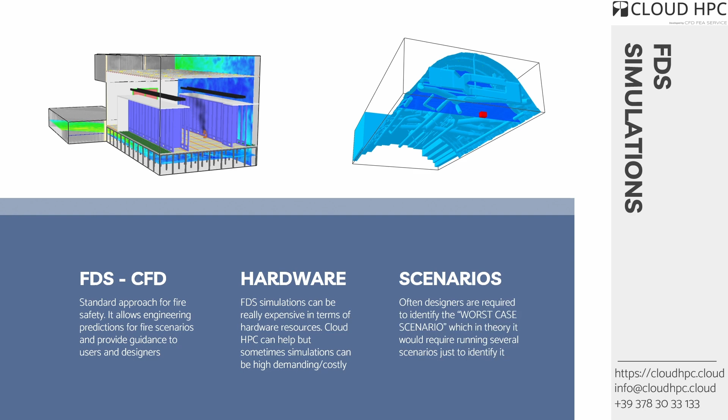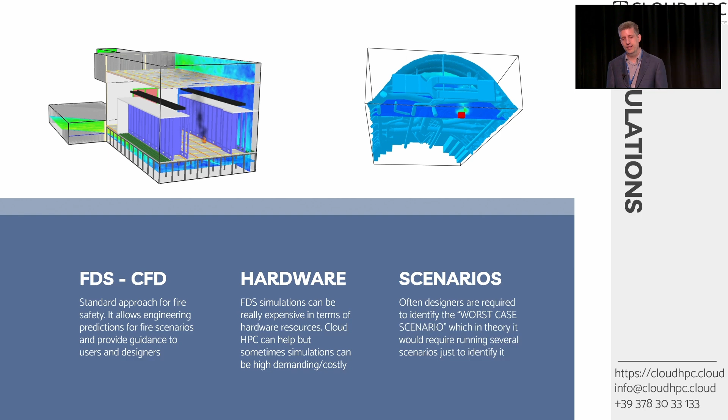Obviously, in order to do that, we have to actually execute simulations. And we know that sometimes simulations can be very expensive in terms of hardware resources to get results. And this gets even worse if we consider that the regulation sometimes forces us to establish the worst case scenario in a car park, in a warehouse, in a building, and to make our considerations in this peculiar case.

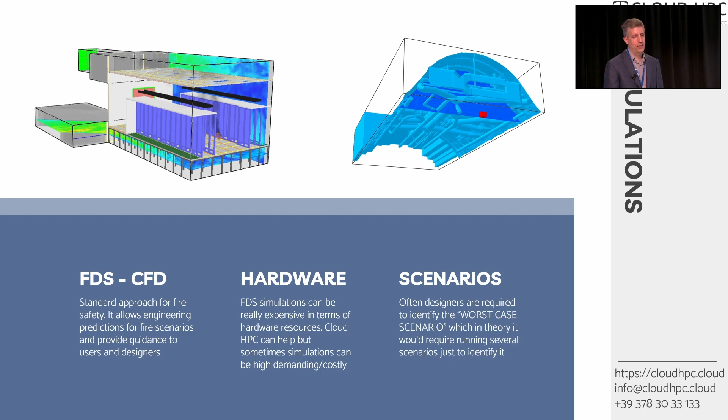So we need experience, or we need a lot of simulations, just to understand where the worst case scenario is, where we have to locate the fire inside our building. And for this, my idea is to use artificial intelligence in order to do two things. One is to make predictions. So instead of running a complete simulation, we can submit first our input FDS file to the artificial intelligence to get an estimate of what the results of this simulation can be.

So we can get these results a little bit in advance to understand if we are actually simulating the worst case scenario or something that is not the worst case scenario. Obviously, this is a prediction. It's not really the results of the analysis. We will still eventually have to perform the simulations, but it can be a quick way to know where our simulation is going to go.

And the second thing we can do with artificial intelligence is getting guidelines. So the artificial intelligence, given the floor of an indoor car park, can actually estimate in which places the worst case fire scenario can be located, and consequently can help the engineers in making the decision of simulating the worst case scenario. Again, these are guidelines. It doesn't mean that the artificial intelligence will tell the engineers where to locate the fire scenarios, but it's another instrument that can help engineers in doing their fire safety activities.

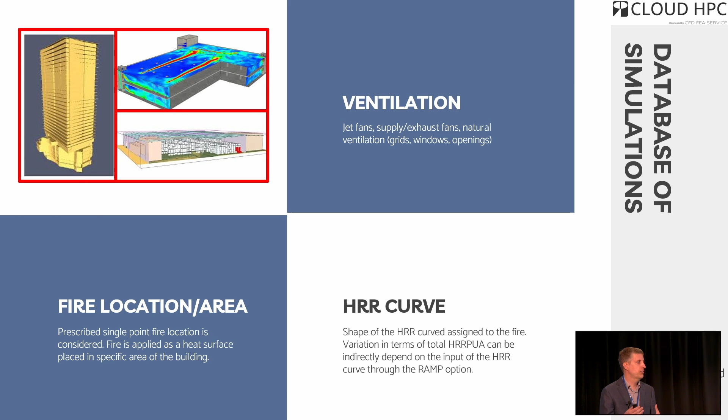And simulation can vary because you have different geometry. So you can have a tall building, you can have an indoor car park, a warehouse, you can have shops, and within shops you can have several shapes of the building, and all this variability should be somehow provided to the artificial intelligence in order to understand how to represent several types of geometries.

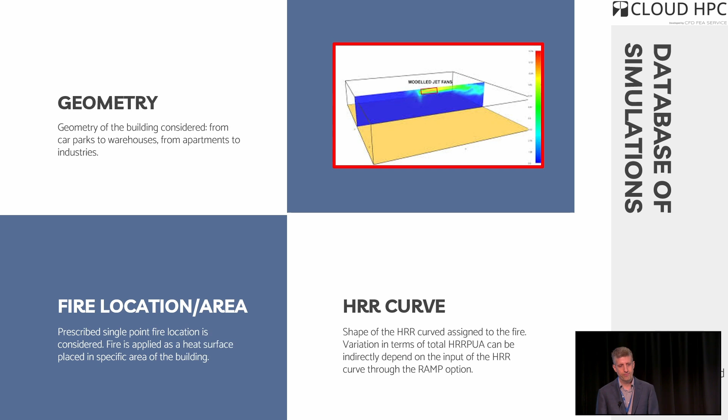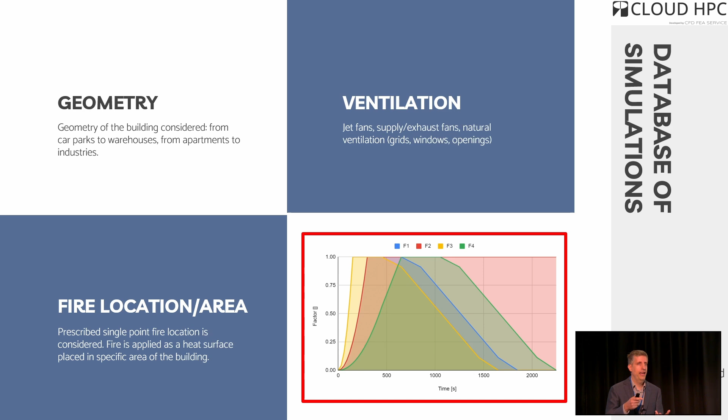You can have variabilities in terms of ventilation. You can have natural ventilation in buildings. You can have duct extraction system. You can have jet fan system. So there is a variability in terms of ventilation. You can have a variability in terms of where my fire is located inside the building. And eventually you can have a variability in terms of the HRR transient curve, which is imposed to the fire.

These are not all the variations you can include in an FDS analysis. There are many others. There could be the presence of sprinklers. There could be fire propagation, as we said earlier. There could be a chemical reaction or different soot or CO yields produced by the fire. There could be also a geometry variation in time. Often in simulations, we have doors that can open or close while the simulation is running when they reach several thresholds.

You know, the variations can be many, and if you also think about the numerical variations of your simulation, sometimes newer versions of FDS include new features, which can induce more variations. You can vary the time step, turbulence models. I mean, there are several parameters that can vary and can make our database of simulations to provide the artificial intelligence really huge. Let's go to the training and let's see how we did that.

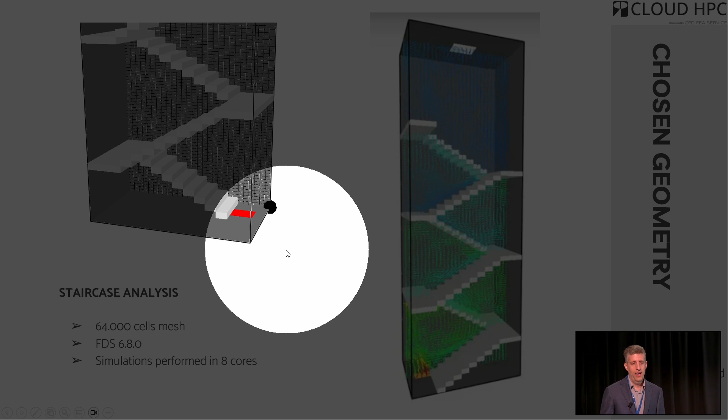Well, we started in a very simplified way. We chose a simple staircase scenario, where we have a fire located in a certain place within the staircase, and we have the stair ramps, and eventually at the top we have openings for the natural ventilation of the staircase. The case that has been used is relatively small in terms of number of cells, so 64,000 cells were used in this particular simulation, and we used FDS 6.8, which was available at that moment.

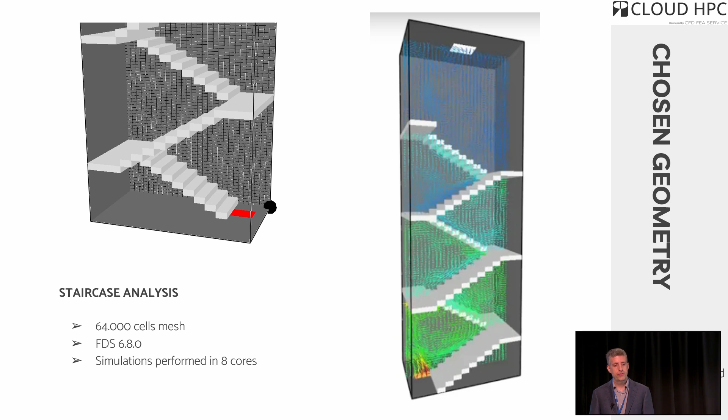Simulations were performed on 8 cores. So we had to split the mesh in 8 in order to reach a good scalability. I think most of you are familiar with that. For all the simulations we performed, we used 4 slices. Okay, we had 4 horizontal slices at several heights from the floor, so 1.5, 1.7, 1.8, and 2 meters from the floor level. And we also had 2 vertical slices aligned with the X and Y axis. And these are going to be used for comparison of the results.

In terms of ventilation, we didn't have ventilation. Actually, there is always ventilation, but there was no mechanical ventilation. There is just natural ventilation. Mesh size, as I said, was about 8 meshes, each of which had 8,000 cells. So altogether it was 64,000 cells. And time, that's important for the transient behavior I mentioned before. So the total simulation time was 1,800 seconds, and we sampled data every 300 seconds.

Okay, so that was used as a sampling for the training, and eventually the artificial intelligence is going to be able to reproduce only the sampled time steps. So I'm sampling at 300 seconds. I cannot ask the artificial intelligence to make a prediction at 150 seconds.

Okay, the artificial intelligence is going to be able to generate the results and the predictions only at the times I provided during the training. And then there was some work to do about the data conversions. I considered VTK an easier data format to convert.

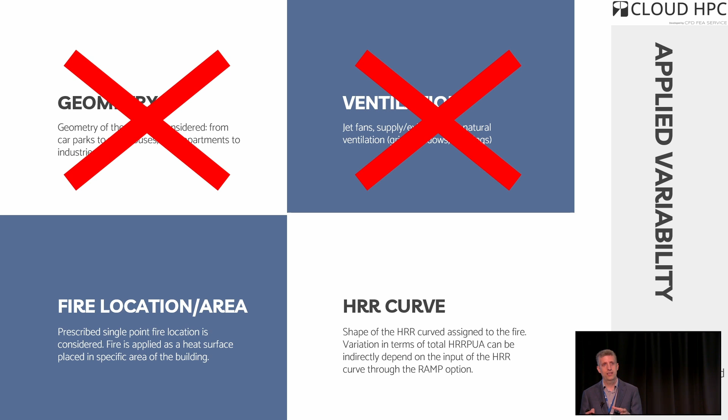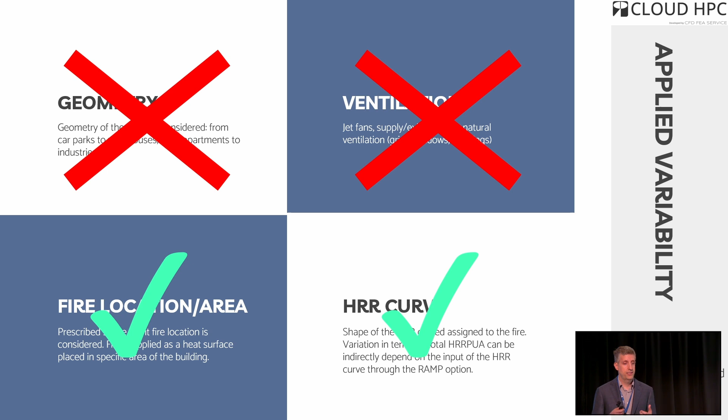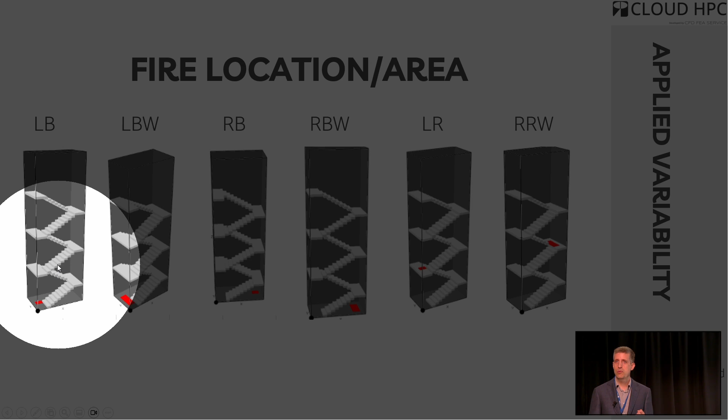In terms of fire locations within our geometry, we set several fire locations inside the geometry. 4 of them were at the ground floor, at the bottom level of the geometry, and a couple of them had a fire after a couple of ramps and after 3 ramps. And we also varied the area where the fire has been located, even if the total HRR produced by the fire remains constant. Okay, so obviously that means we are varying a little bit the HRR per unit of area in the 2 cases to have the same HRR in both cases.

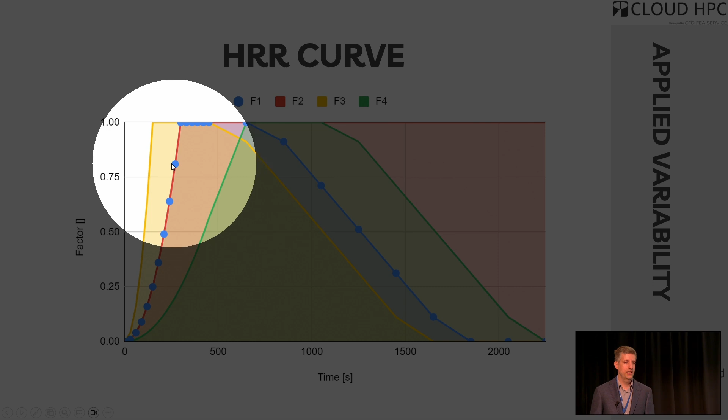Instead, for the HRR curves, we used 4 different curves. They all started at 0, and the curves had a variation in terms of T alpha, so the time required by the fire to reach its maximum value. And then they all slow down in a similar way.

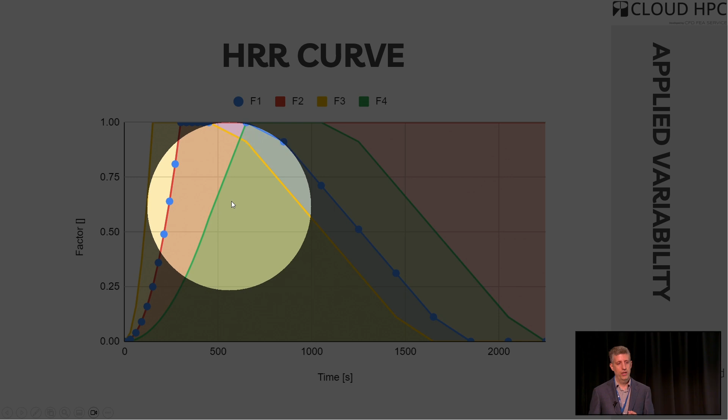Altogether, we defined 24 different cases, so 6 variations in fire locations and 4 variations in fire HRR curves. You can easily imagine that having these very little variations, we already were at 24 cases. If we are going to introduce geometrical variations and also ventilation variations, it's easy to get to thousands of files just to provide the training for the artificial intelligence.

Out of these 24 cases, we had to divide them into 3 groups. 18 cases were used to make the real training of the artificial intelligence. 4 cases have been used as testing. So the artificial intelligence, while doing the training, from time to time tests its own prediction to evaluate if the training has been sufficient. So overall 18 plus 4 makes 22 cases used for the training of the artificial intelligence.

2 cases instead were not passed to the artificial intelligence, were completely ignored by the artificial intelligence, and were going to be used by ourselves in order to evaluate the predictions the artificial intelligence was doing.

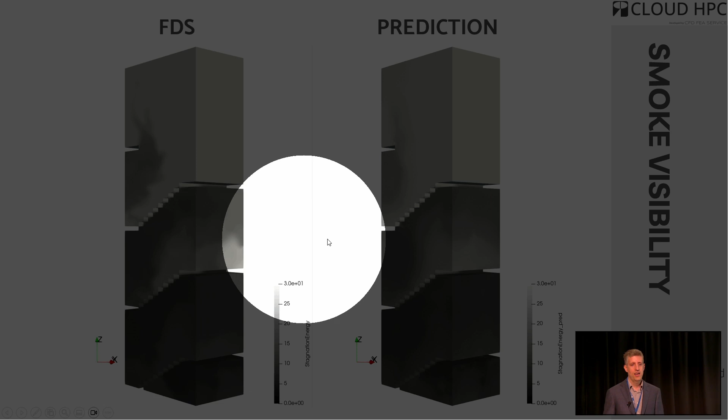And eventually we get to the predictions. So we start with the smoke visibility. Here we have on the left-hand side the FDS results of the simulation, and on the right-hand side we have the prediction made by the artificial intelligence.

This is a time variance, a transient analysis, and what we can see is the variation every 300 seconds up to 1,800 seconds of the simulation.

Overall, in this case, the prediction was qualitatively quite well computed, so it's difficult to say which one is computed and which one is predicted if someone didn't know. Even if we measure every single cell, we can notice there is some slight difference between the predictions and the results of the FDS analysis.

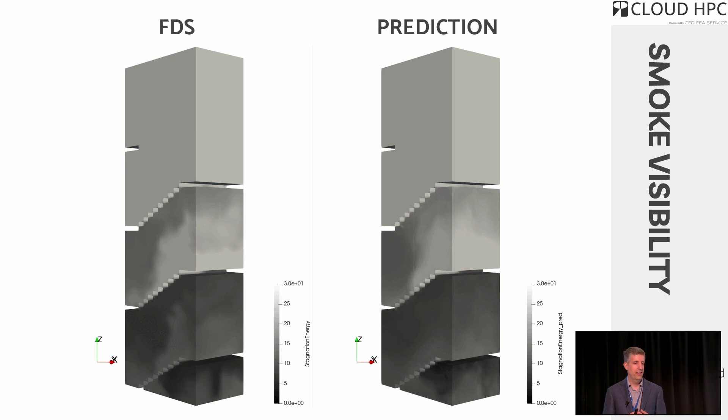A similar result has also been achieved in terms of temperature estimation. Here I have just the results of temperature after 300 seconds. We can see that there are some differences between the actual CFD simulation and the prediction.

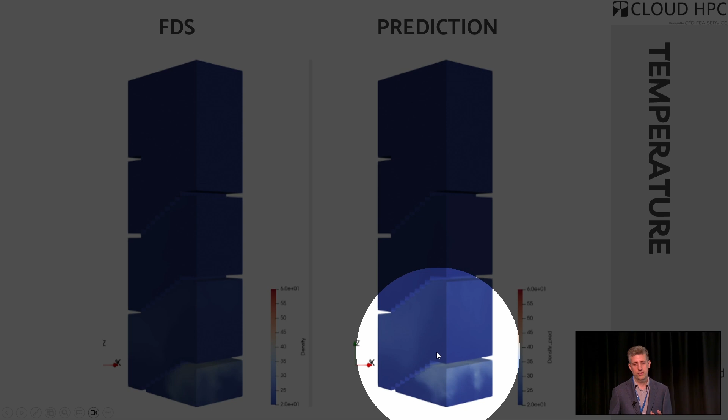If you can see, we have a little plume of temperature, which here is estimated to be a little bit more moved to the right-hand side from what I can see. But qualitatively I can see that the temperature is mostly blocked by the first ramp, and we have a little plume going upwards, which can also be seen in the estimation.

Again, qualitatively the results are captured, but there are some differences within some, let's say 10 to 15 percentage points of error in the predictions between the prediction and the FDS analysis.

Just to mention, once the training activities have been completed, getting the prediction from the FDS file is basically instantaneous. It's just a matter of a few seconds, and the artificial intelligence was able to provide us the VTK file, which can then be opened to compare the results.

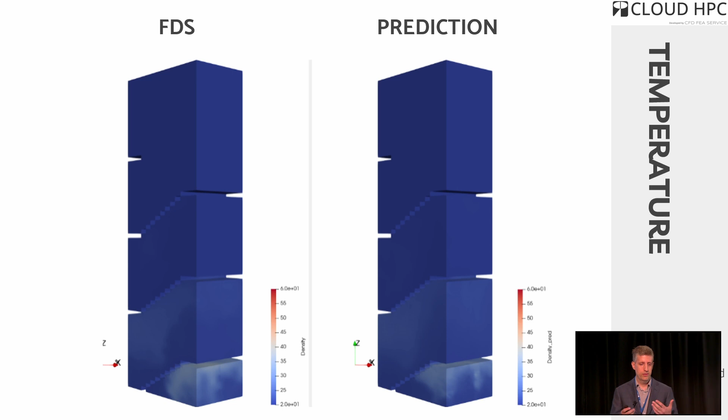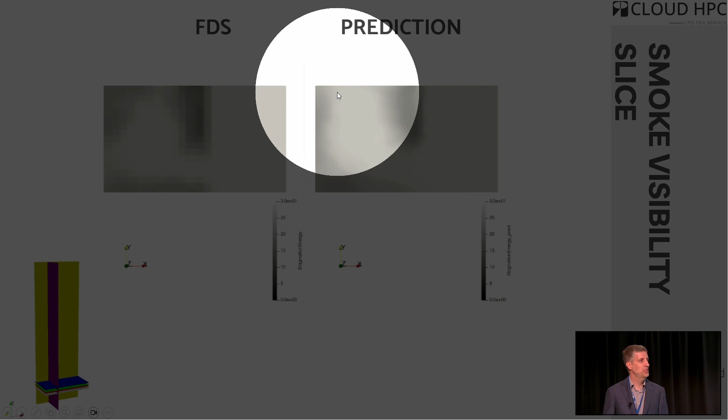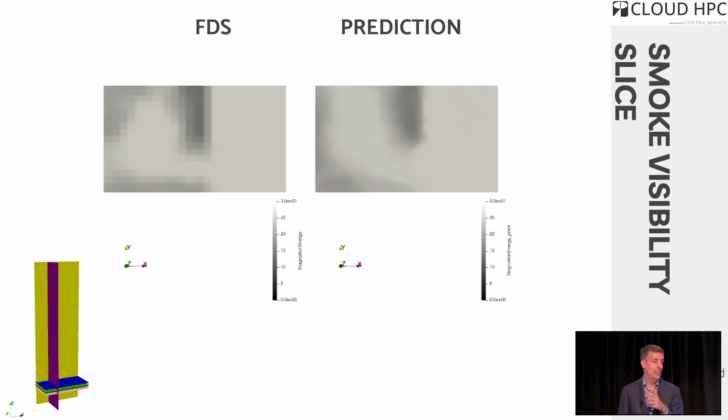I also compared the results within the slice. This is another little exercise I did. In our case, the mesh was rather coarse, and I was able to modify the mesh coarseness, the cell dimensions, in the artificial intelligence to create smoother results. That was just a feature allowed when making predictions with the artificial intelligence.

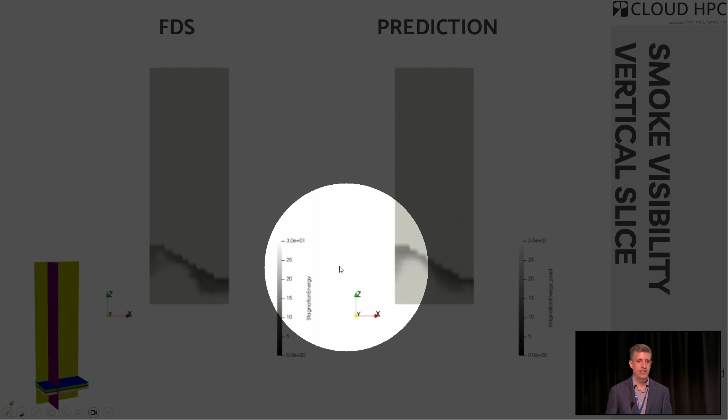And this instead is the vertical slice, where again, after 300 seconds, most of the feature and qualitative data of the simulation has been captured by the artificial intelligence.

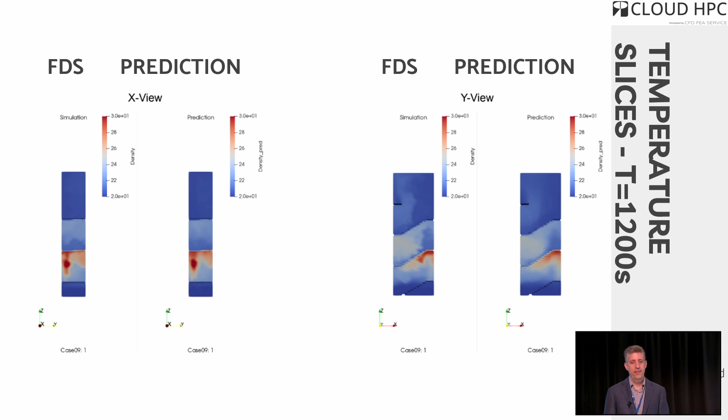Mostly the area where the temperature reached a certain level is captured correctly by the artificial intelligence prediction, and this is the same variable, temperature, but this time after 1,200 seconds, and again qualitatively it's difficult to distinguish what's a prediction from what's the result of the FDS analysis.

So the conclusion from this first work is that artificial intelligence can predict at least the main features of our FDS simulations. It is important, though, to generate a wide database of simulations. In our case, the database we produced was relatively limited, and we were only able to predict staircases basically. I couldn't predict anything else beyond that.

And once the predictions are working, it's easy to expand the prediction capability of the artificial intelligence in order to define guidelines for engineers to be applied in running the simulations.

Obviously, there is some work to do in order to expand this tool and include more capabilities. One of the biggest problems is managing bigger mesh sizes. Currently we were able to train the artificial intelligence just on a case with 64,000 cells, so relatively small, and managing bigger mesh sizes is a big challenge.

And we have to include geometry variation. There are some possibilities and algorithms that allow this to be done, which have to be implemented as well.

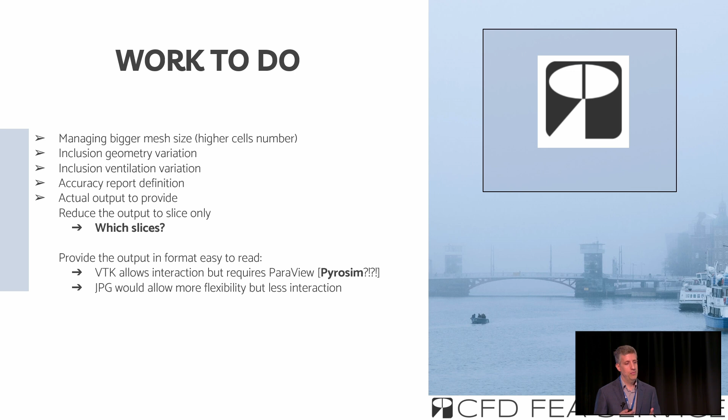And then there are a couple of questions I want to put to the whole audience. One is, in terms of output, what would be the best output to provide? Here I was able to provide the whole domain in VTK file format, but in theory it's also possible to provide output in terms of images or slices. It would be nice to know where to place these slices, where it would be more sensible to place them, in order to get familiar with the information provided by the prediction of the artificial intelligence.

Currently, that falls within what I call the geometry variations of the model. I haven't implemented anything in this regard.

I have 2 or 3 possibilities. One is that since we provide the input FDS file, we already have the geometry in the FDS file, so instead of expecting the AI to generate the geometry, we can pass the geometry as input data to the AI - that's probably the easiest solution. Another option: there are procedures in libraries like TensorFlow or PyTorch that are able to make geometry predictions, using results from one geometry to predict results in a different geometry. I still haven't found a final solution to this, and for that reason I haven't implemented it. I'm not showing that, but there are a few possibilities I need to investigate in the coming weeks and months.